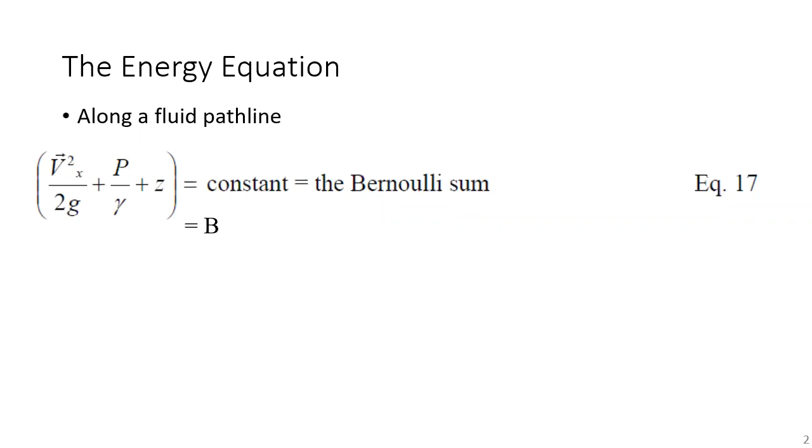Much better. Thank you, I usually don't look at that. For those components, again, the first 5 or 6 slides are the same slides from the end of last class. We're just doing a review.

So the Bernoulli sum has the dimensions of length, and that's the total energy at that specific point in the fluid. The first term, velocity squared over 2 times the acceleration of gravity, is kinetic energy. We call that the velocity head. And V is the average fluid velocity, and how we get that is by taking the total discharge and dividing by the area.

Conversely, we could use the energy equation, for example, to calculate discharge. And in that case, we would use the energy equation to calculate the velocity, as you'll see in some of the examples.

The P over gamma term is an old friend from fluid statics. It's identifying potential energy. And again, gamma is what differentiates or distinguishes fluids. Obviously, if you have the same pressure with different specific weight, it gives you different pressure heads. And then Z is, again, potential energy.

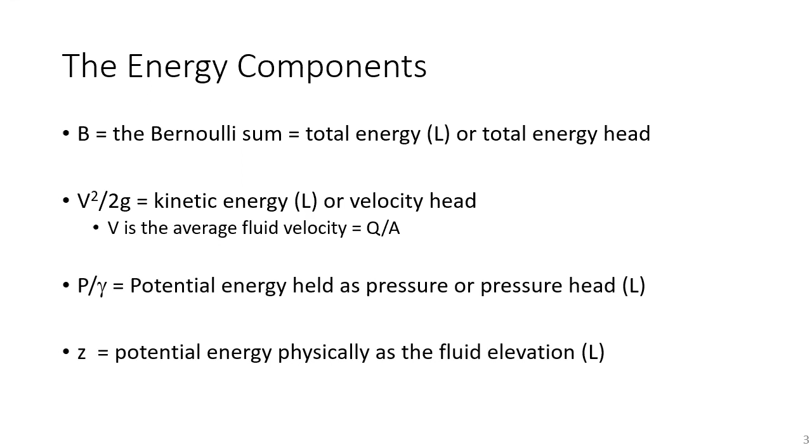And now we're just talking about the elevation of the specific point of the fluid on that path line that you're talking about. So in general, right now, B is constant. In the future, it will not be. And we'll see some of those changes as soon as next class.

As long as you have a continuum and you can draw this path line, anywhere on that path line, the Bernoulli sum is a constant.

If the fluid is moving, do not expect fluid statics to be operative. In some cases, it appears as though it is. And that's just because right now we're saying that the total Bernoulli sum is a constant. In the future, that's not really true anymore.

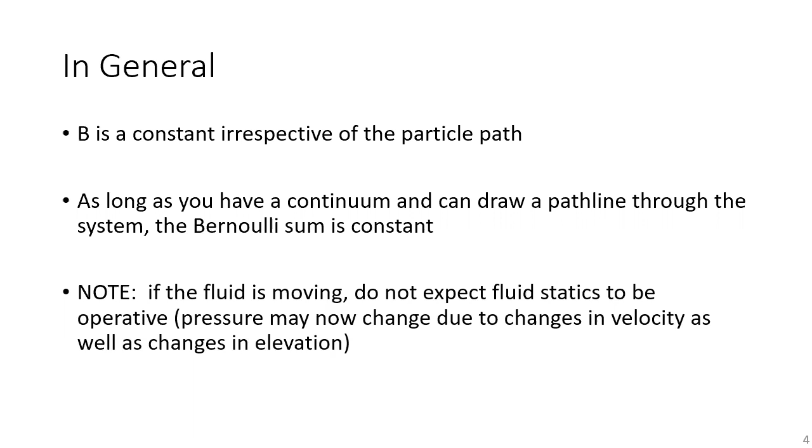So P equals gamma H is not in general operative, but as I showed last class, if you happen to have a fluid that's static, that static condition is a subset of the general energy relationship. We also introduced grade lines.

So the sum of those 3 components of energy, we call the energy grade line. And if you can calculate these 3 components at any point in a fluid, you can trace out that sum, and that sum is known as the energy grade line.

The sum of just the potential energy components, pressure head and elevation, are known as the hydraulic grade line. And when you're doing designs, you typically have to show one or both of these in your designs for your systems. In a single pipe, these are just lines, but we do this for entire distribution systems, so it's basically a surface over the entire city where we're plotting this out.

So here is a very simple figure of what's called a venturi. You'll be studying these in two labs in this course. Flow is from the left to the right. With this flow being left to right, you are going from the original cross-section of 75 millimeters into the smallest cross-section, known as the throat of the venturi. So what you've done is dramatically decrease the diameter.

If the discharge is constant, then what's happening is the velocity is getting much larger because V1 is Q over A1 and V2 is Q over A2. Because the diameter and therefore the cross-sectional area decreased significantly from 1 to 2, the velocities had to increase.

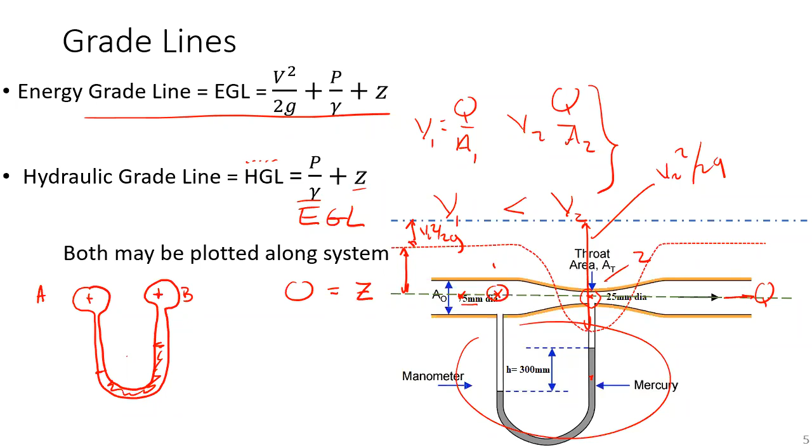Well, what is the difference between the hydraulic grade line and the elevation? So the dashed red line is the hydraulic grade line. The dashed green line is Z. HGL minus Z is P over gamma. So what you have is this term is P1 over gamma.

And in this case, P2 over gamma is physically below the pipe. Can that happen? I've said this thousands of times in here, it seems like. You've all had this experience. You've all done this in your life, but you've never put algebra or math to it.

I'm sure most of you have used a straw. This is what's happening in a straw. In a straw, you have negative pressure. What's happening when the hydraulic grade line goes physically below the pipe, you have negative pressures in the pipe, and that can certainly happen. There's nothing wrong with that.

So what you did in this case was you converted P over gamma to V squared over 2G. And so you stole energy from potential energy, the P over gamma, in order to get the velocity high, the velocity at V2. So that's why the hydraulic grade line, energy grade line, and Z all look the way they do. They're all representing their individual forms of energy.

Expect to see a homework problem on this. Expect to see it on exam 2. Expect to see it next semester.

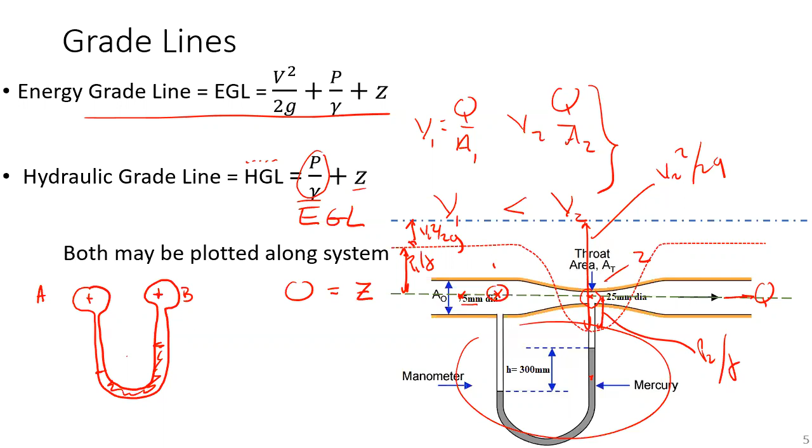For energy problems, we trace out a path line. We can select any points, as many as we want. Here I selected two points, point 1 and point 2, on the path line. The total energy at point 1 equals the total energy at point 2, equals some number. It's a number at the end of the day, and it can be positive or negative. The energy grade line can be below the pipe.

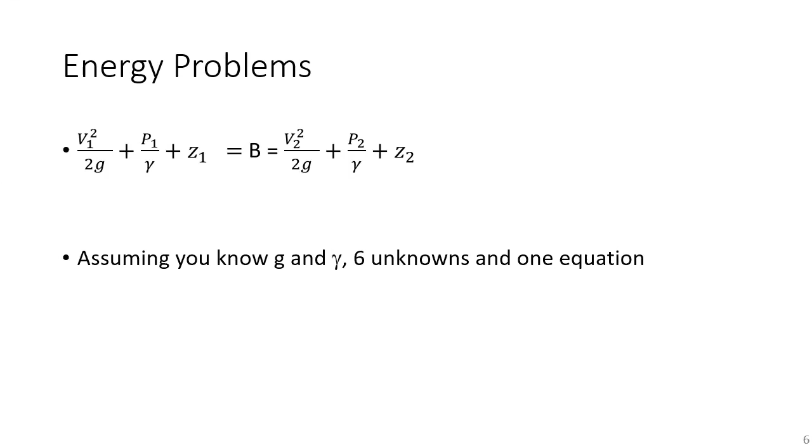Assuming you know g, the acceleration due to gravity, and the specific weight of the fluid, we have 6 unknowns in one equation. So we either need 5 other equations to solve, or a combination of 5 other equations and boundary conditions, known variables.

When would the energy grade line be below the pipe? I was going to get to that, but since you asked: when is the energy grade line below the pipe?

Glass of milk, okay. We're going to call our elevation datum right at the free surface. You can call it wherever you want, but I'm putting it at the free surface. What is the pressure at the free surface? Zero.

Now, we haven't gone through this thoroughly, it's on one of the next slides, but for your glass of milk, there's really no velocity in it. So where's the energy grade line? What is 0 plus 0 plus 0? Zero. So not only is z equal to 0, it's also the energy grade line. The energy grade line is the free surface. This is an important knowledge point: whenever you see a large body of fluid that has a free surface, you are looking at the energy grade line.

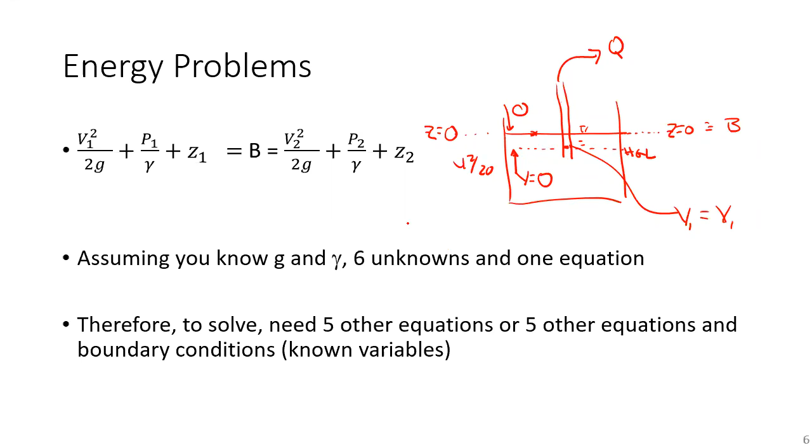What will happen if you can accept this? Let me escape, and then insert a slide, and go back to presentation.

The straw does this, this pipeline does it. What is the limit? Again, the limit is always the vapor pressure. How do they really do this? We're going to talk about mechanical energy and pumping next class, but that's how they move water around. That's probably the easiest way to explain it. We can always move the pipe around, and the energy grade line is what the energy grade line is.

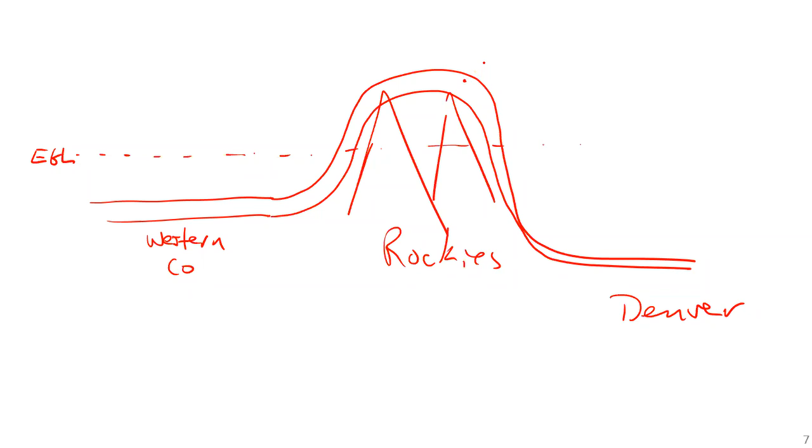The problem with a system like this is it's a fatal flaw system. This is spinach for the brain. If you have one hole in that pipe, have you ever tried to use a straw with a hole in it? Try it sometime, it won't work. What happens is air will enter the system when you have a negative pressure, and that blocks the flow. So we usually do not like negative pressures in our distribution systems, they're not very helpful to us because of that fatal flaw.

It's almost impossible not to have leaks in pipes. I was talking to the operator of a community system of 270 people up north on Lock Lake, and they have about 18% leakage, unaccounted for water. So they know how much water they're putting into the system. If you divide that 18 gallons a minute by the 270 users, it's hard to measure that. So there are things that are beyond our capacity when we're designing systems.

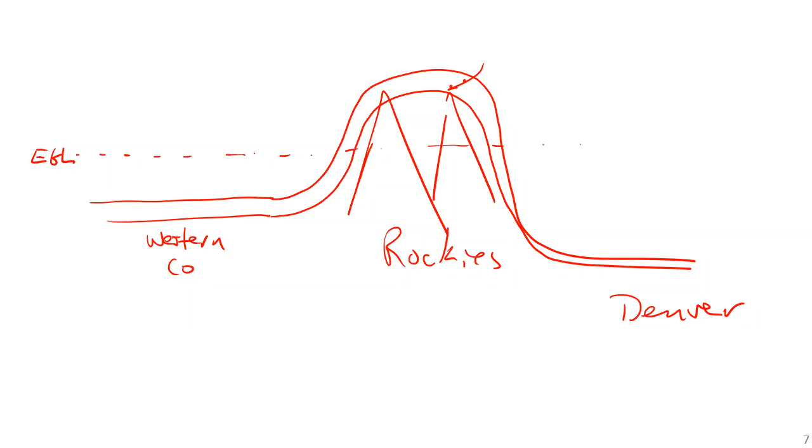You're kind of foolish if you design negative pressure systems. Do we do that sometimes? Absolutely. For example, vacuum sewers, we actually will design negative systems. And it has everything to do with how we're manipulating the energy grade line in all of these systems.

Okay, so this again is slides from last time, and I'm going to do examples. I'm just reviewing and reminding you of all this. How do we solve these problems?

First off, how do you know it's an energy problem? That's the most difficult, challenging question you'll have. Well, is the fluid moving, or is there relative motion? If there is, energy is involved. Even if the fluid is not moving, static systems are a subset of energy. So you're basically still using the energy concepts, but fluid statics is a subset.

In order to solve the energy problem, though, you may need continuity or some other equations that we'll be getting to. So the first thing you want to do is sketch the system. More often than not in this course, whether it's an exam or a homework problem, you'll be given a sketch. In very rare cases, you'll be just told, well, you have this horizontal pipe. If you just have a word problem, sketch it, sketch the system.

It helps you and it helps us grade your work. And when you leave here, it will also help people review your work. After you've sketched the system, make sure that you can draw the path line between the points of interest.

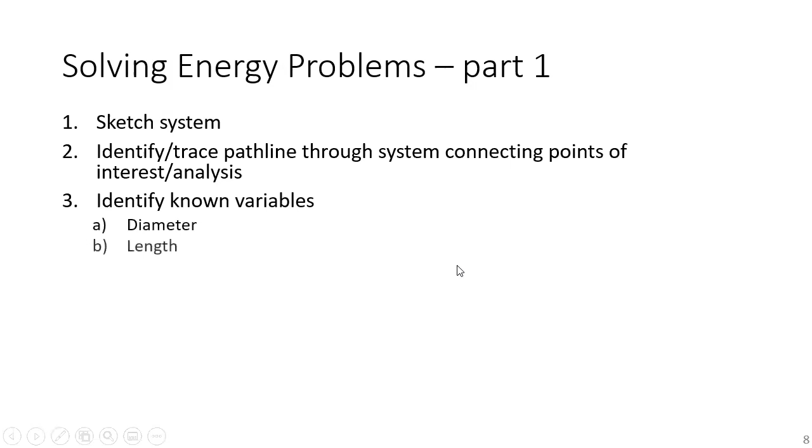Once you've done that, identify the known variables and all the different pieces or components of the system. And again, I gave you a list of these known variables last time.

And then the fourth thing is you need to, for me, always show the elevation data. When you leave here, you may be working in, for example, the North American Vertical Datum, 1988 NAVD, and all your elevations are in a relative datum, but we know what that datum is. If you're using a local datum, like I did in the previous problems, you need to show us where Z is equal to 0.

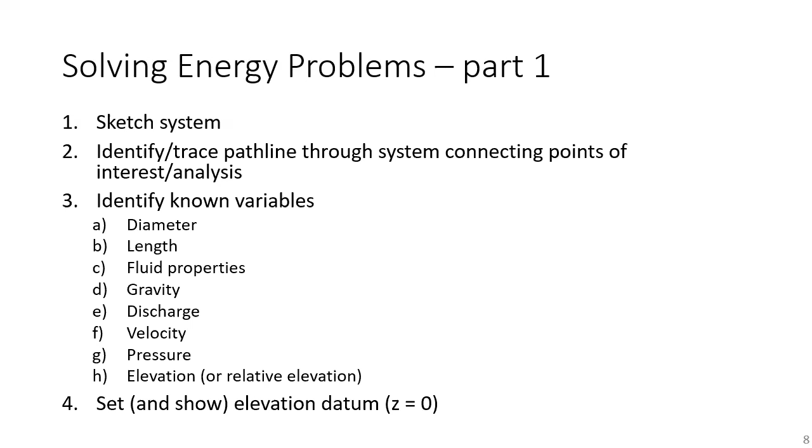My guidance to you, if it's possible, always set that datum at the lowest elevation of your problem. Then you always have positive elevations. If you set your elevation datum where Z is equal to 0 high and you have components below that, you just have to remember you have negative elevations. And that negative sign typically somehow gets lost when you're doing problems.

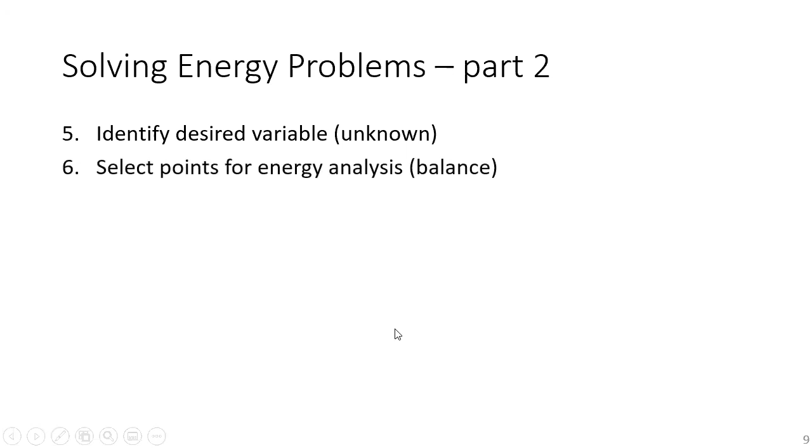Fifth, identify the desired variable, the unknown. What are you after? Select points for the energy analysis, doing an energy balance. One point's typically where you know information, and another point is where you're trying to calculate information, the unknown variable. And then lastly, apply and solve the energy equation for the points of analysis.

You're going to see these steps again. So I'm going to do an example and we're going to reiterate these exact 7 steps to show you how I'm doing it each time. When you're doing problems in here in this chapter, you should basically be following these 7 steps.

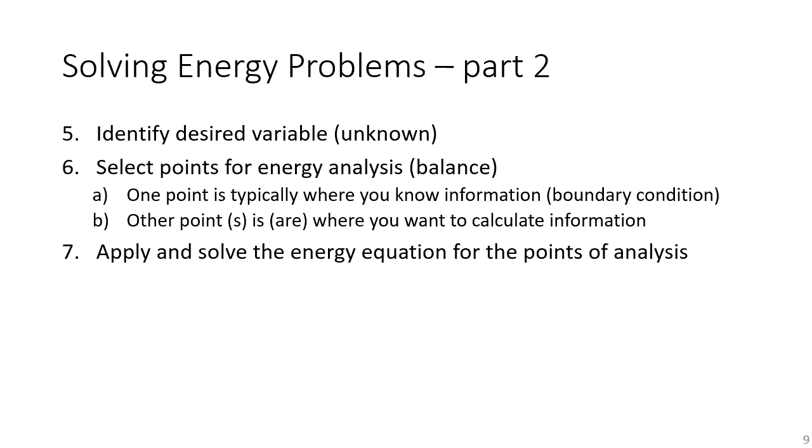Okay, so this was, I think, where we ended last time. Where do we pick points? There is guidance for where you pick points. Any free surface - so the example I just gave you before with the glass of milk, free surface, we know the pressure is 0. And that can be the free surface of any fluid in any of these situations. I think you understand what the surface of a reservoir is, the surface of a river or a stream.

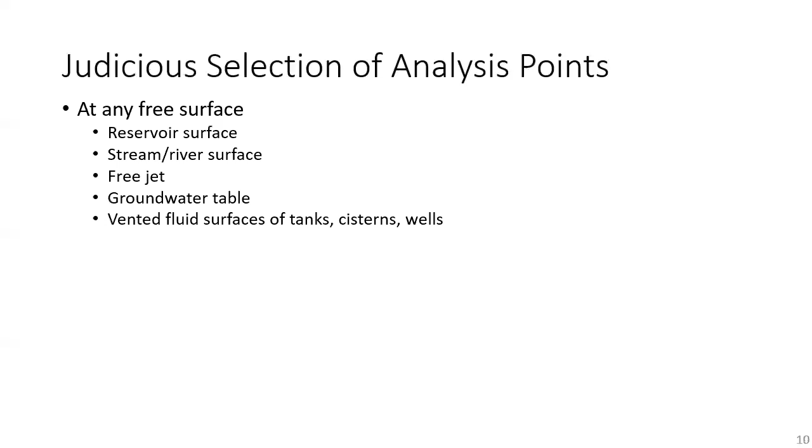Free jet, we're going to do in the next example. I will explain what that is. The surface of the groundwater table, or surfaces in vented tanks - all of these have atmospheric pressure. We work the problems in the gauge pressure datum, and therefore atmospheric pressure is 0. 0 PSI, 0 feet of mercury, 0 Newton per meter squared, whatever dimensions you're using, it's 0.

The other thing you look at is when you have very large volumes of fluid, there's fluid moving compared to small cross sections. In the large tank, the velocity is almost zero. And therefore we assume that when we have large volumes of water in systems where fluids are moving, the velocity head, v squared over 2g, is basically zero. It's negligible.

Your pressures or pressure differences are given. So if you see a gauge giving you pressure, or you see a manometer or a barometer, that should be one of your analysis points.

Why? You're given information. Remember, we have this one equation with 6 unknowns. So you want to select points that help us solve that equation. And it may not solve the equation exactly where you want it, but each time you pick a point, you may be picking up more and more information that you know. So in one problem, you may have applied the energy equation 3 or 4 times. Each time you're picking up a variable you need.

And again, gauges, manometers, and lastly, where you know elevations or elevation differences. You'll see this as a common theme in a lot of these problems: where you're given information, that's where you should usually select points.

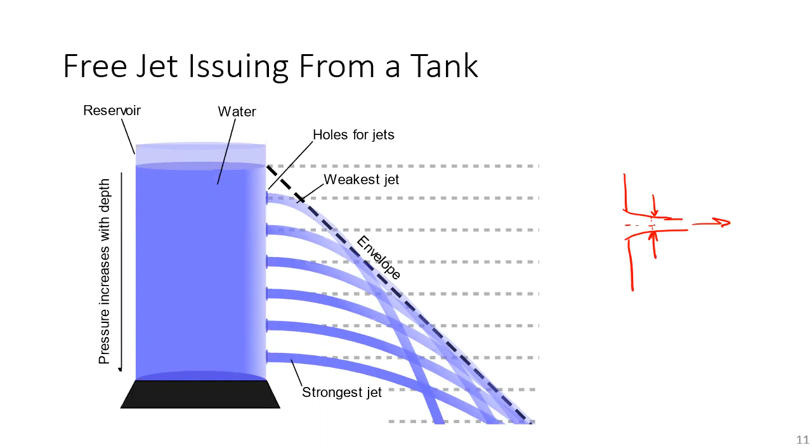So the pressure, for example, at the center line of the free jet is atmospheric. Pressure at the edges, the outside surface of the free jet, it's zero. In the previous one, I identified what that free jet was, and that's a point of analysis for you.

We're going to look at just one of these free jets. Again, a hole poked on the side of the tank, and we want to apply the energy analysis. First thing we do is sketch the system. That's what you see here.

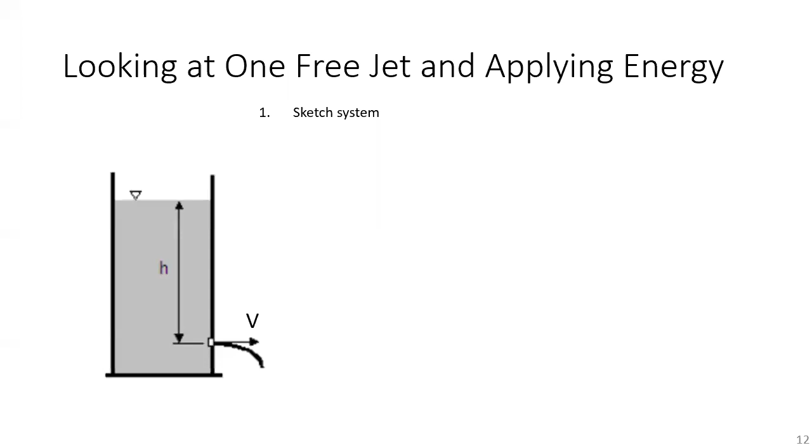The next thing we would do is identify or trace a path line through the system, connecting points of interest or analysis. You could do this anywhere, but fluid is basically flowing from the tank into the free jet.

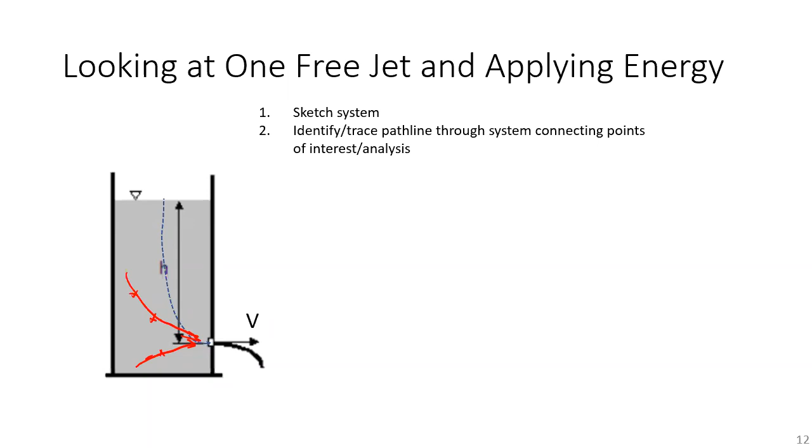And we can pick any points along a path line and say that the Bernoulli sum at one point is equal to the Bernoulli sum at another. The issue or the importance of the previous slide was there is a judicious selection of the points.

You want to pick points where you know information. We're going to identify the known variables. For example, in this one, let's say you're given H. We're given the orifice diameter, so that hole in the side of the tank is known as an orifice.

We're going to set and show the elevation datum. I thought I put it in there. Let me just go ahead, yeah, there it is. So here I'm putting at the center line of the free jet, Z is equal to 0. That's my elevation datum.

So that was step 4. Step 5, identify the desired variable, the unknown. In this case, let's say we want to know what is the discharge Q from the system.

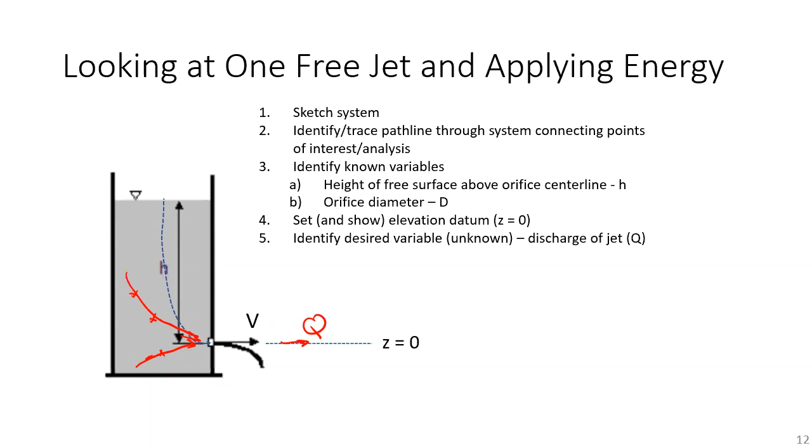Now, if we wanted to, we could just apply continuity, right? Just like in the cross section of a pipe, just like you did in the fluids lab, discharge is velocity times area. Well, we don't know the discharge and we don't know the velocity, so continuity doesn't help us. It's maybe a step in the right direction, but by and of itself, continuity doesn't help us.

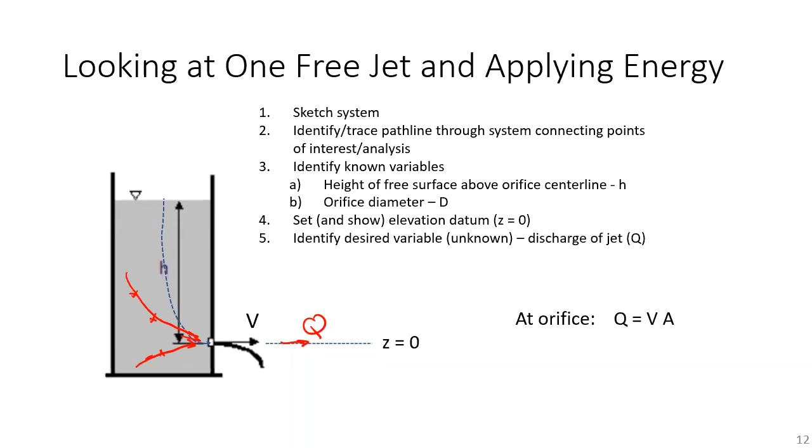However, what we could do is look at this as an energy analysis. So this is the same problem, but now step 6 was select points for an energy analysis. One point is typically where you know information, and other points are where you may also know information, but it's where you want to calculate information.

What do we want to know? We want to know the velocity of the water leaving that orifice so we can use continuity to calculate the discharge.

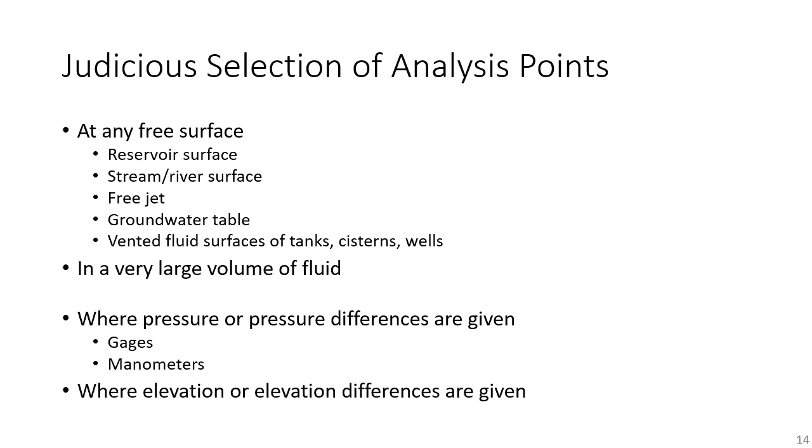So again, this was the previous slide: judicious selection of points. Do you see a free surface anywhere in this system? Of course you do, at the top of the tank and the free jet. So we have this and we have this. Those would be two locations that should pop off of the paper at you that would say, pick me. These are two analysis points.

We also have a large volume of fluid, and again, what that means is the velocity is going to be approximated by zero if we pick a point in that large volume of fluid. There's a caveat with that, and I will give it to you.

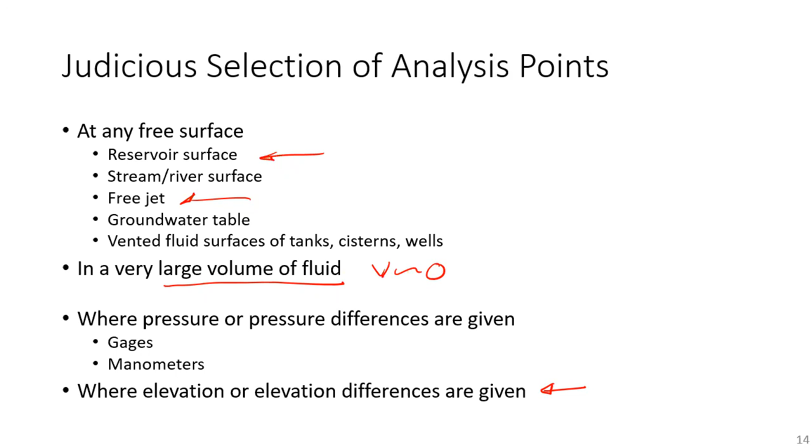And we also have this. We know that the free surface is H above the center line of the free jet. We'll see that in the next slide. So this is where we were before, we just had that interim slide.

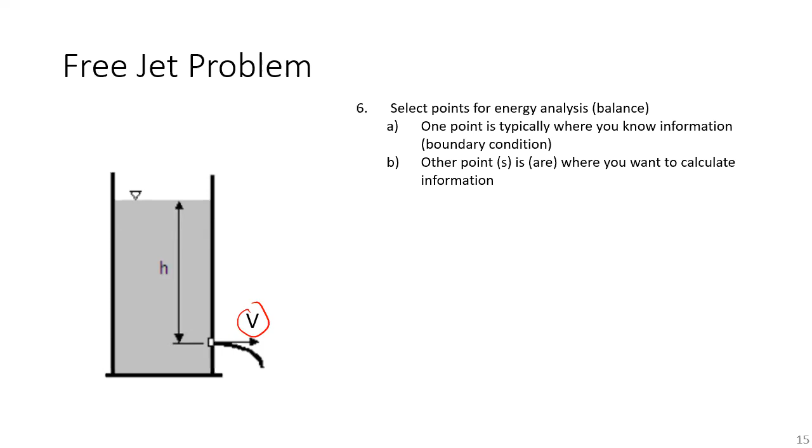And we want to pick some points of analysis. What are we after? If we can get that velocity, then we can use the continuity equation to get the discharge. So let analysis point 1 be at the free surface. Here's point 1. Let analysis point 2 be at the center line of the free jet outside of the tank.

Never pick point 1 here. You will be seduced into thinking you can use fluid statics, that the pressure is gamma H. It is not. At the free surface, we do know what the pressure is. In the vicinity of that orifice, you have velocity, and therefore you do not have atmospheric pressure anymore. So I don't want to see anybody saying point 1 is horizontally across from the orifice.

That's not good. So point 2 is going to be at the center line of the free jet. And what does that mean? Well, we're going to use an energy balance, and we're going to say that the total Bernoulli sum, V1 squared over 2G plus P1 over gamma plus Z1, is equal to the Bernoulli sum at 2, V2 squared over 2G plus P2 over gamma plus Z2.

And again, throughout the entire system, that's a constant. So just like the glass of milk, are you looking at the energy grade line anywhere? Right here, right? So this is, as you're going to see, the energy grade line.

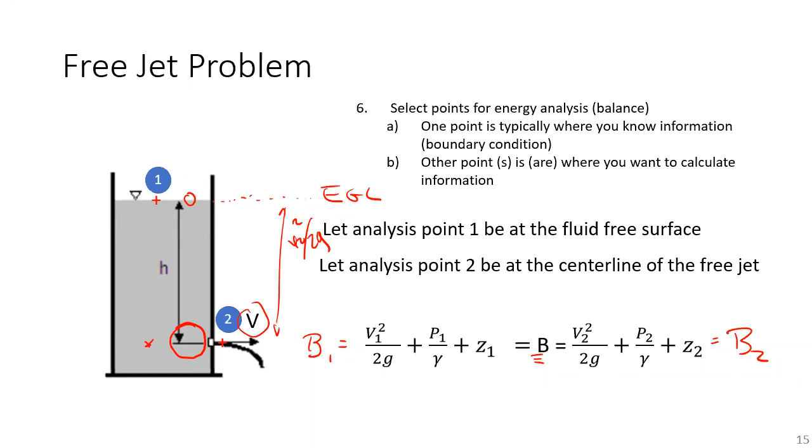And the reason why is all energy losses are a function of velocity. The higher the velocity, the more the energy losses, as you'll see later on in this semester. So at point 1, we know the velocity at the free surface in the big tank is approximately 0. Free surface, atmospheric pressure is 0. The elevation of point 1 is H above our elevation datum. Our elevation datum is the center line of the free jet.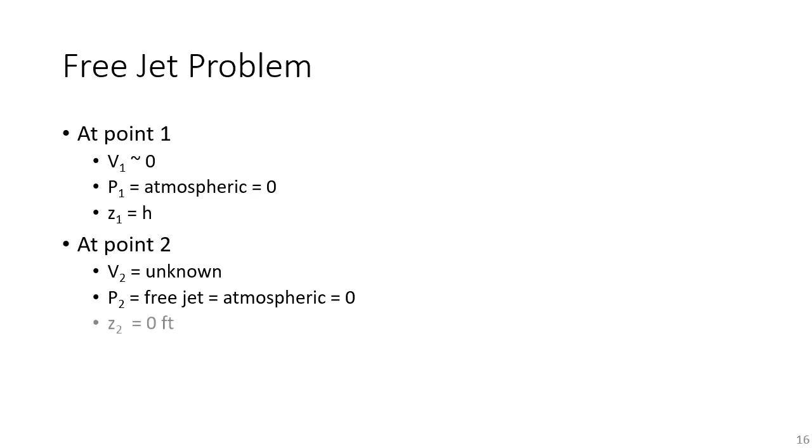At point 2, which is the center line of the free jet, we don't know the velocity. It's a free jet, so we have atmospheric pressure, and so P over gamma, or P2, is 0. And Z2, we judiciously put the elevation datum right at point 2, so that's 0.

So if we again start with our energy equation, that energy equation is identifying the energy components at each point, and now we're just going to insert each one. V1 squared over 2G is 0 because V1 is in a large tank and is very, very small and therefore negligible. P1 over gamma, well, we have a free surface at point 1, so you have atmospheric pressure, P1 over gamma is 0. And Z1 is H. So everything on the left-hand side just boils down to H, which again, that's the energy grade line. That's what we drew on the last figure.

And that's equal to V2 squared over 2G, which we do not know. That's what we're actually using the energy equation for. P2 over gamma, since it's a free jet, P2 is atmospheric, so it's 0. And Z2 is right on the elevation datum, it's 0. So you're left with B2 being V squared over 2G and B1 being H.

Again, at location 1, you're keeping all of your energy as elevation. At point 2, you've converted all of that energy to velocity and to kinetic energy. So the result is this boils down to H is equal to V2 squared over 2G.

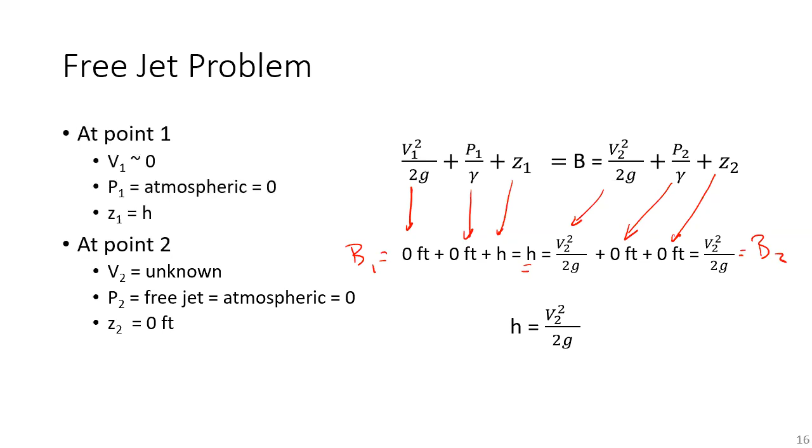If you were, remember at the beginning of this problem, I said if you're given H and the diameter, you can calculate the discharge by calculating the velocity. So we can take this equation, I believe I put it on the next page. So there's our equation we just developed. Point 1 was here. Point 2 was outside of the tank, but in the free jet.

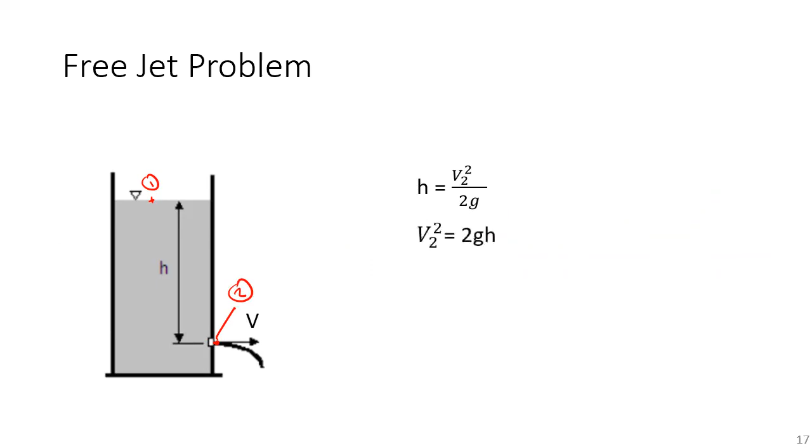So we rearrange this equation. V2 squared is equal to 2GH. Take the radical sign, V2 is square root of 2GH.

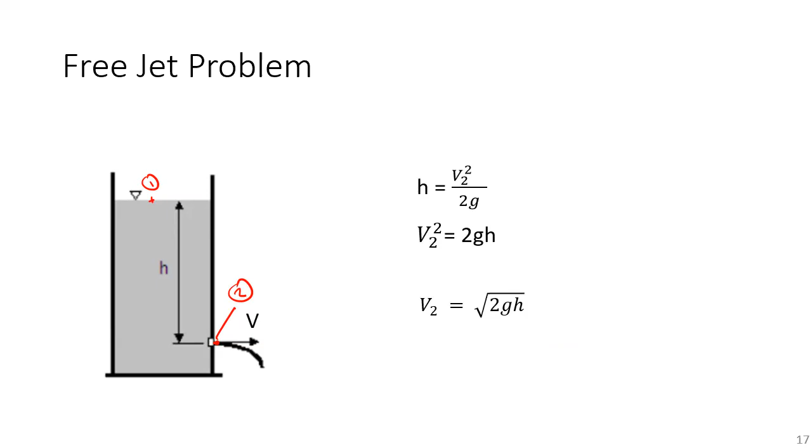And again, we're going to use this in continuity. That equation is known as the Torricelli equation. It's an equation we use very often. It's also known as the orifice equation. Why? Because you have a free jet issuing from an orifice. We use this in many different engineering designs, this very equation.

A leak from a pipe follows this equation. When we design stormwater systems and we want to back up water, we use a small orifice because they're very hydraulically inefficient. So the primary spillway for stormwater systems might be an orifice just to fill up the stormwater system and hold the water back.

When we have energy losses, we have to add in some type of a loss coefficient. We're getting to that in this course. So this is the theoretical Torricelli equation, but ultimately we have to face the fact that we do have viscosity, and viscosity is going to lead towards energy losses. But this gives us how to calculate the velocity.

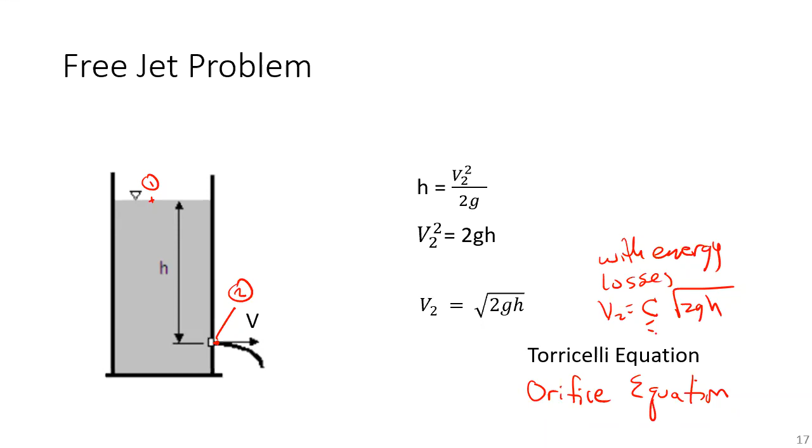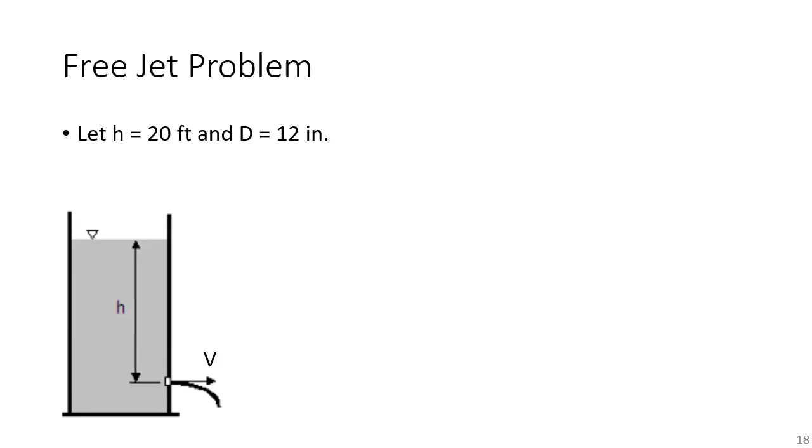Same problem. If we had H equal to 20 feet and D equal to 12 inches, which I think most of you know is 1 foot, then from this equation, V2 equals square root of 2GH, 2 times 32.2 foot per second squared times 20 feet is 35.9 foot per second, which is a healthy velocity. And therefore the discharge is V2 times A, which is 35.9 foot per second.

Are there any questions on that before I go on?

This tank is a conceptualization. All that tank is telling you, you know the energy grade line.

Have any of you ever used a pressure washer? Okay, pressure washer, you have a closed tank under pressure. And that's a little pressure gauge in case you didn't know it. That pressure gauge might be 200 PSI and industrial ones up to 2000 PSI or up to 10,000 PSI. So when we were using a device to clean permeable pavements, it had a big vacuum head and it had jets, and the pressure in the tank was 10,000 PSI. And then what happens is you have this little hole on the side.

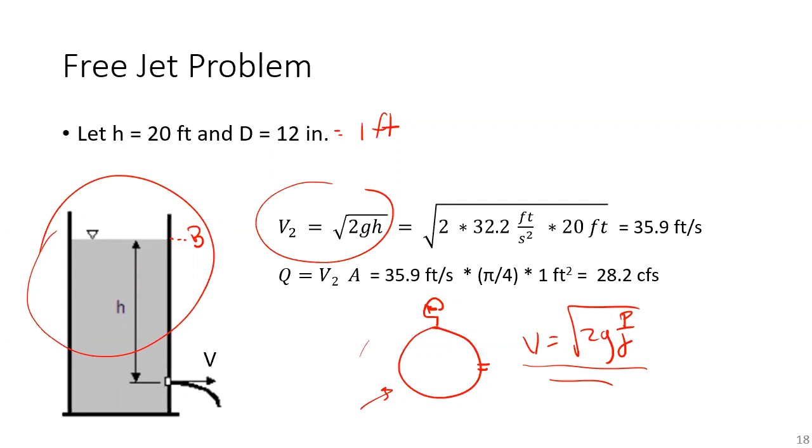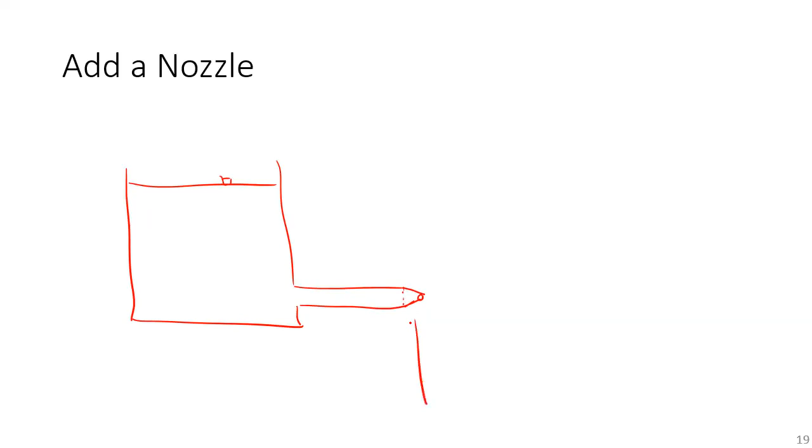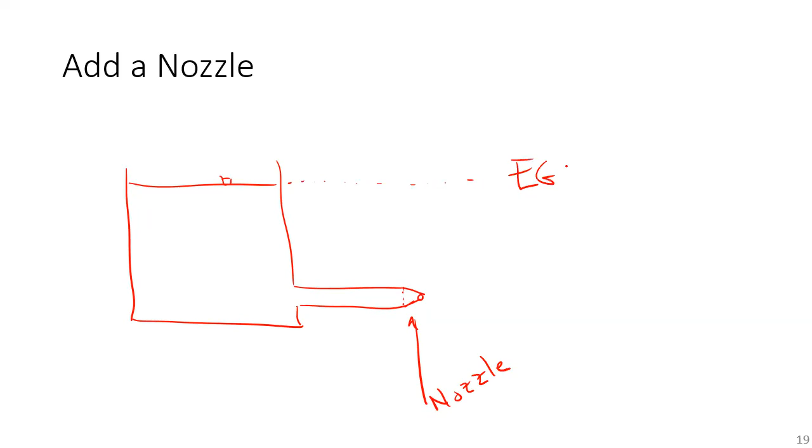So if you have a garden hose, same thing. Your garden hose is maybe 1.25 inch, 5/8 inch, and at the very end you put in a nozzle to do the same thing we were just talking about in the last problem. When you look at this system, whenever you see this large tank and a free surface, that's your EGL. That's the Bernoulli sum, right? Whenever you see that, you should know that.

Remember, as you had in fluid statics, you can have a surface in a tank, but if you have a pressurized system, that is not a free surface. In a system like this, that might be your energy grade line because the surface of the fluid in the tank is under pressure. That is not a free surface. If we put a manometer on the side of this tank, the fluid in the tank would rise up to the energy grade line.

I've told you, we've discussed this before, I've just reintroduced it to you. I'll give you a problem on it, and for some reason you want to forget it, but just recognize what you're looking at. If instead of putting a manometer right there it was just a free jet, would that just create a vacuum? If you're looking at unsteady, what happens with time? Yes, you would create a vacuum.

And actually you could create what's called a Mariotte bottle, in which the only way for fluid to leave after a while is for an air bubble to come in. And that actually gives you a constant discharge system. So that's a very specific type of device we use for some instances.

So the difference is you're thinking unsteady, and the energy equation was actually developed for steady state. So you shouldn't really be using the energy equation as we've developed it for an unsteady problem. You can certainly apply it as a succession of steady states: apply it over a certain time interval, then recorrect the system so the water level drops and the flow changes, next time step, next time step. That's actually a common way many numerical codes handle, for example, pressure distribution systems—they look at it as a succession of steady states.

So here's our nozzle. What's happening is we have this discharge issuing out of the nozzle. The difference is continuity is still operative. So when you go from the tank into the pipe, the velocity in the larger diameter pipe...

Velocity in this large diameter pipe is much smaller than the velocity in the nozzle. The pipe leading up to the nozzle is still under pressure. In the tank, you're storing all of your energy as elevation. Once you're in the pipe, you've taken the elevation energy and converted a little bit to V squared over 2G and the rest to P over gamma.

It's exactly how pressure water distribution systems are designed. We have these water tanks all over the place, and the water flows in the pipes where we keep velocities pretty low intentionally. We store the energy as the water moves through the distribution system as pressure. Then at the very end—that nozzle, that's the faucet in your home—you convert all of that P over gamma in the pipe to remaining velocity head.

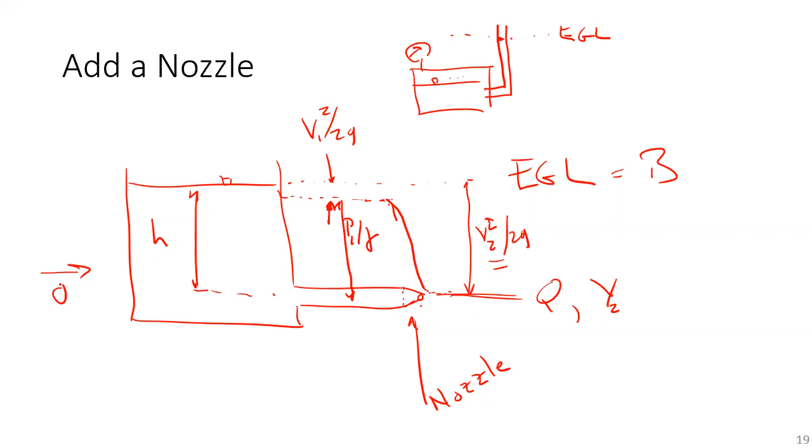If you look at this today and tomorrow, you see the same thing. This tank is so enormous we're not draining it. But in reality, the water treatment plant typically pumps in at a constant discharge, and we're using water with demand following a diurnal curve. So what's going into the tank matches what's coming out of the treatment plant, meaning in real life these tanks fill and fall. In this problem, we're just looking at a snapshot, and this is the way it always looks.

So to calculate the pressure at that point in the pipe—right here? Yes, we're not considering it a free surface because... just like in pressure distribution systems, if you poke a hole in this pipe, the water would shoot up that high in your circulation system.

Your blood pressure is probably really high right now, but 120 over 80—that's 120 millimeters of mercury. If you converted that into gamma of blood, it would shoot maybe 3 or 4 feet. In the free jet, we have atmospheric pressure, and you've converted all the energy to V squared over 2G. That's why in many systems there's always a nozzle at the end of the line, and in piping systems we use larger diameters to keep the velocity heads small.

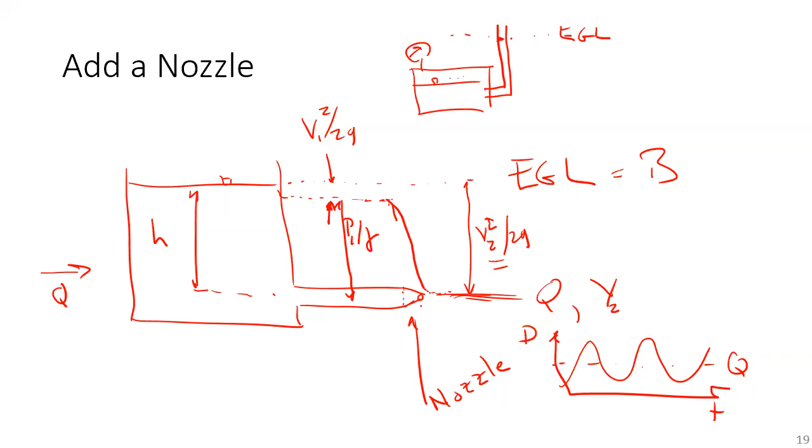I have 6 minutes remaining, and I'm going to do something—I'm going to do a numerical example next time of just energy, but it's going to take about 15 minutes. So instead...

Let me just introduce mechanical energy. In this case, mechanical energy is putting energy into a system with a machine. A pump puts energy into a system; a turbine removes energy from a system. So, for example, here's a pipe.

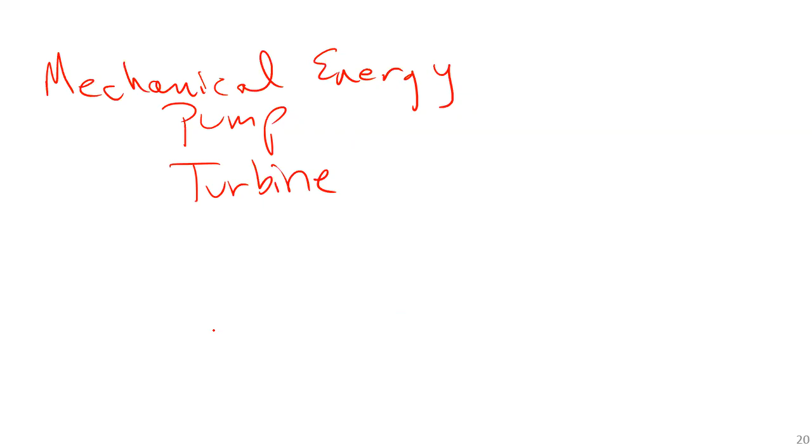Let's say if flow is from left to right, that might be the EGL if we add no mechanical energy. B1 is equal to B2 is equal to B3. Everywhere we have the same energy grade line.

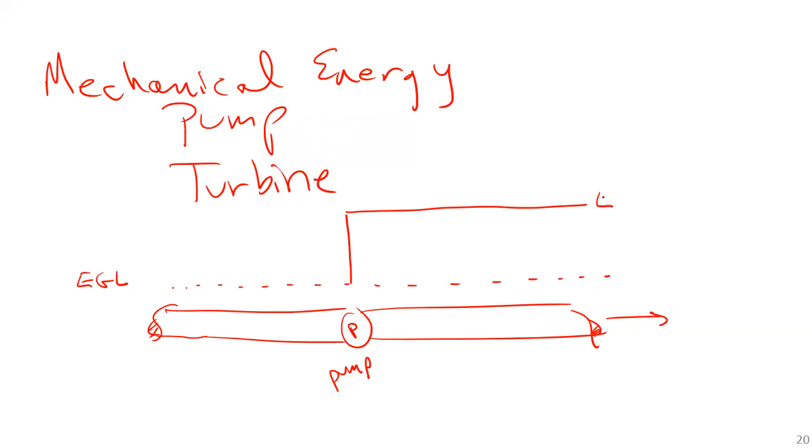If this is a pump, what does a pump do? It adds energy. And so philosophically, what's happening is we are raising the energy grade line.

This is upstream of the pump, and this is downstream. If we select a point here, upstream of the pump, point 1, and a point here, downstream of the pump, point 2. For no pump, we would say B1 is equal to B2, a horizontal line. When we add the pump...

Which is larger, B1 or B2? B2 is higher. What a pump does is put energy into the system. So let's call that energy EP.

And if we're going to equate these two, for a pump, the energy is added to the upstream location where you're doing your energy analysis. Again, point 1 is upstream, point 2 is downstream. What you would say is that the total energy at 1 plus the pump energy is equal to the total energy at 2. So this would be B2 and this would be B1. The difference between those two is the energy of the pump.

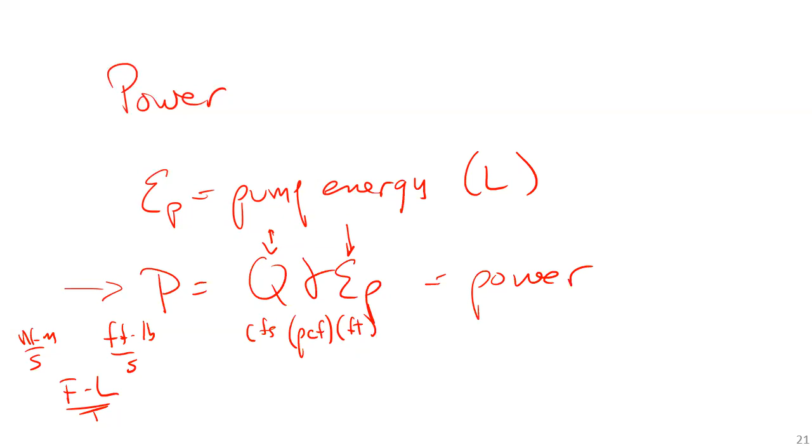So when you go to the hardware store, or when you specify, you go to pump manufacturers, you specify the pump based on power, but you're basically getting a certain performance. And that performance is a certain discharge and a certain amount of head. And typically EP is looked at, typically, if you go back to the previous slide, you have a constant diameter pipe.

What can you say about V1 and V2? V1 is larger than V2. Less? This is actually an important concept. Can you have a pump where more flow goes in than out? Can you have a pump where less flow goes in than out?

So think of the pump as this box. A pump does not create fluid. So whatever goes in, goes out. So the discharge in and out of a pump is the same. Has to be. If you find a pump that has more water coming out than going in, bring that pump to me. You're creating water, or you're creating that fluid.

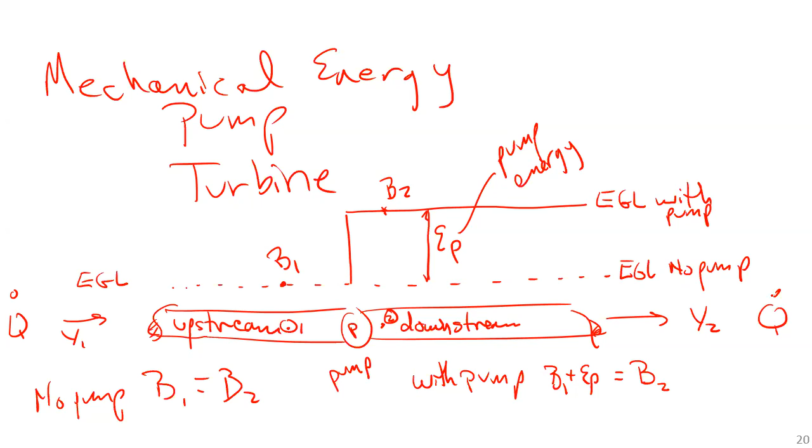So if the Q on both sides is not changing, the diameter of the pipe on both sides of the pump is not changing, what would continuity say about the velocity? It's the same. So EP is basically being converted to P over gamma.

So the pump, inside the pump, water's spinning around, and inside the pump, you're creating energy as V squared over 2G. As it leaves the pump, it's going into P over gamma. And that's what we typically do with pumping systems. We just keep bumping up the pressure. That's how we get the water over the Rocky Mountains to Denver.

So I know I'm over. Next time, we're going to continue with just a simple energy problem, and then we're going to continue with mechanical energy.